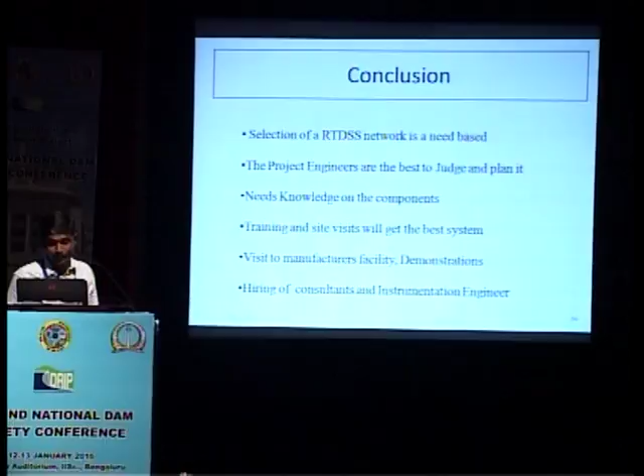Deltares is a research institute in the Netherlands, and I will tell you something about rapid assessment tools for dam safety. I would like to share some of the experience from the Netherlands. I thank the organization and the chairman for the opportunity to present our experience. So a brief overview of the presentation.

I will talk about water management. I will talk about satellites, about satellite measurements. I will talk about FEWS-DAM, our software system we use for safety assessment of dams and dikes. And finally, I will try to conclude in the time limit.

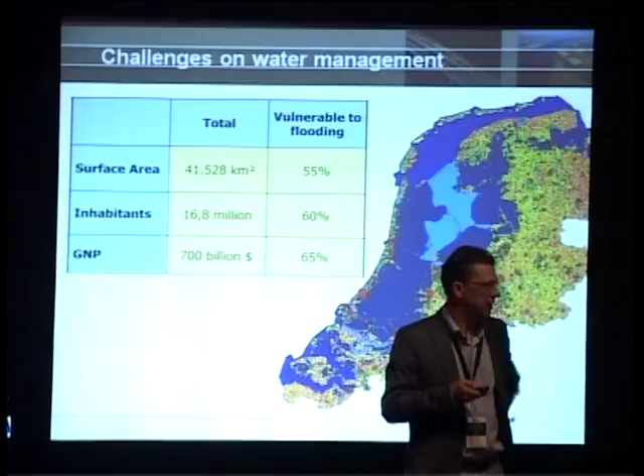Something about the Netherlands. The Netherlands is only a small country in Europe. I think already the state here, Karnataka state, is already 5 times bigger than the Netherlands. It's important to notice that the Netherlands is a country which has a large part of the country below sea level, as demonstrated here in this picture, where you see our country.

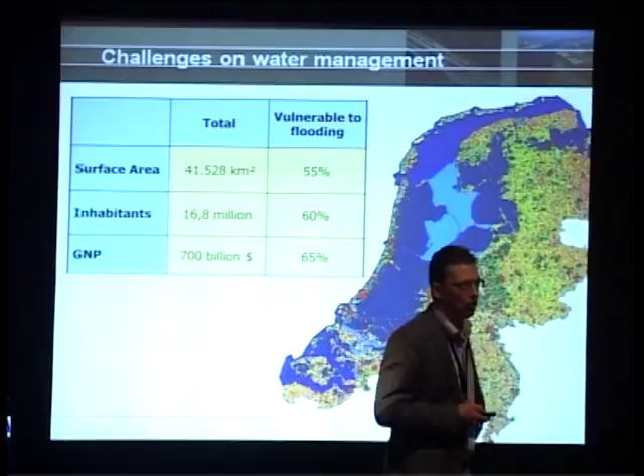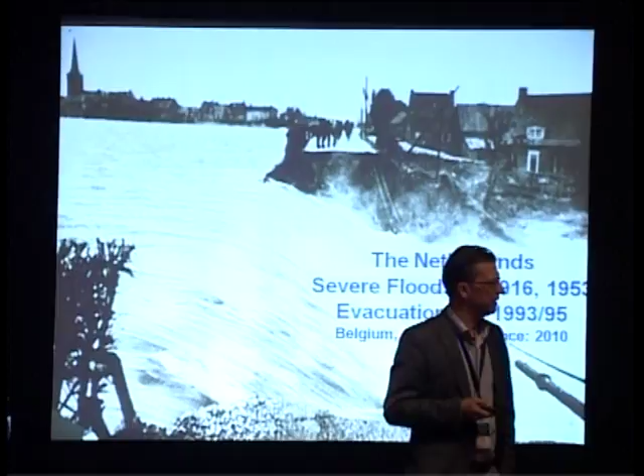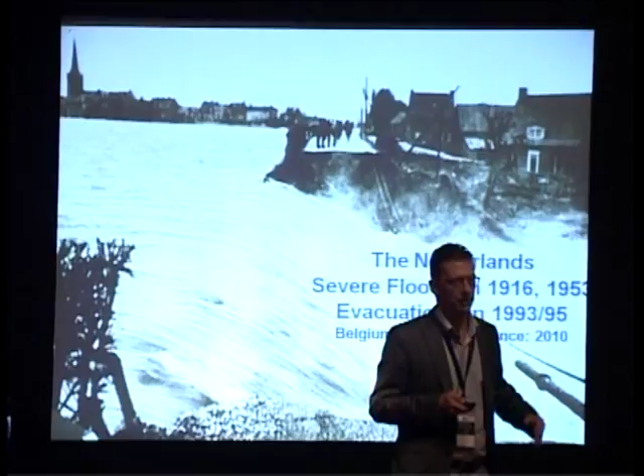If we had no flood defense, about half of the country would be flooded. So we have had problems in the past with floodings. In the 1950s, we had a big flood in the Netherlands, in the southwest corner of the Netherlands, causing about 1,800 loss of life. And also later on, we had flood situations that made evacuation needed in the 1990s. So we had our share of problems.

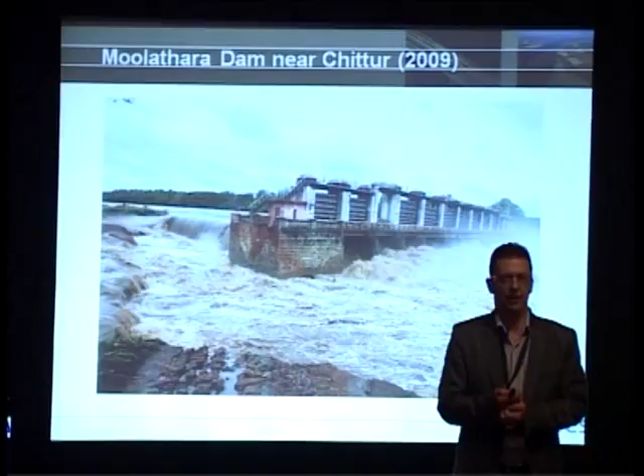Also, looking at the internet, what's happening in India. For me, this is the first time in India, and it has been a wonderful experience. And looking at what's happening here, I noticed this one. Also in India, you see a lot of challenges with water management, drought, and also flood.

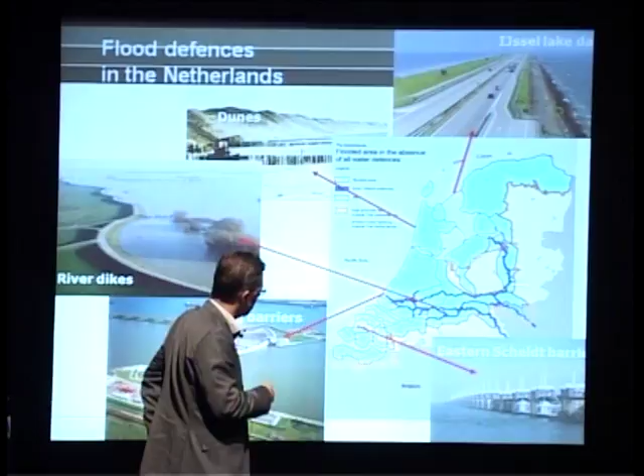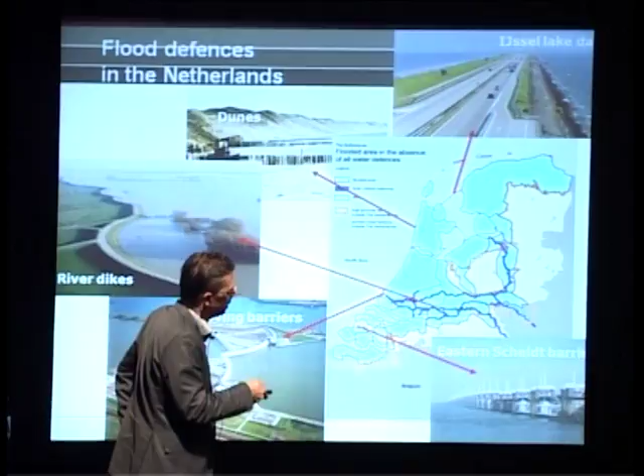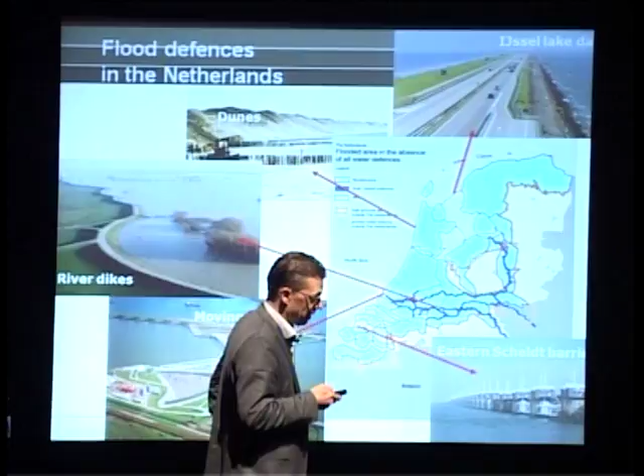To tell you a little bit about the flood defense system in the Netherlands, we have a lot of systems to make sure that we keep our feet dry, as we say. Here's the Netherlands, and the North Sea. These are our main rivers. So it's a threat from the sea and the rivers. We have dunes, we have dikes along our rivers over here. We have moving barriers to seal off entrances to the sea, etc. So we have a whole set of things to work with.

So now to the first innovation that we think is important to share also with you. That is an option to apply in India, and this is the use of PSInSAR satellites.

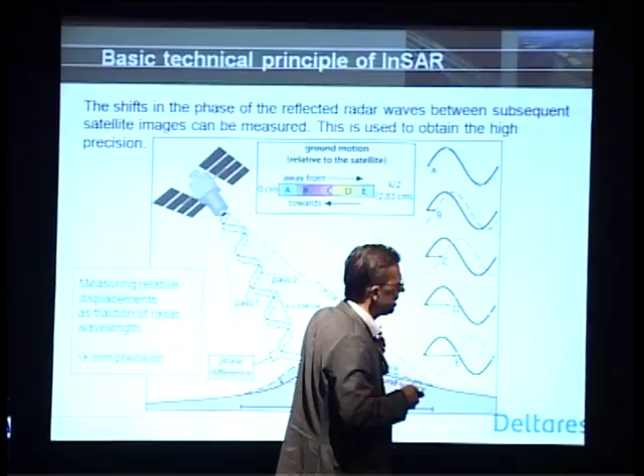These satellites are flying around the Earth. At the moment, new satellites have been launched in Europe that pass over India twice a month approximately, doing measurements. These measurements I'm talking about do local measurements. What I'm talking about here is persistent scatterer radar. You see here a picture, the satellite is flying over and sending out pulses and receiving reflections. Then on the second pass, about two weeks later, it will do the same, and we will look at phase differences between those reflections that you receive. That gives you information of the subsurface, the surface of the Earth, and that is essentially the measurement principle of this system.

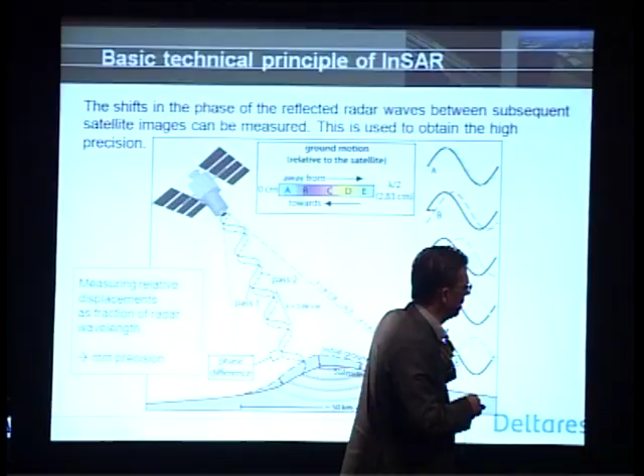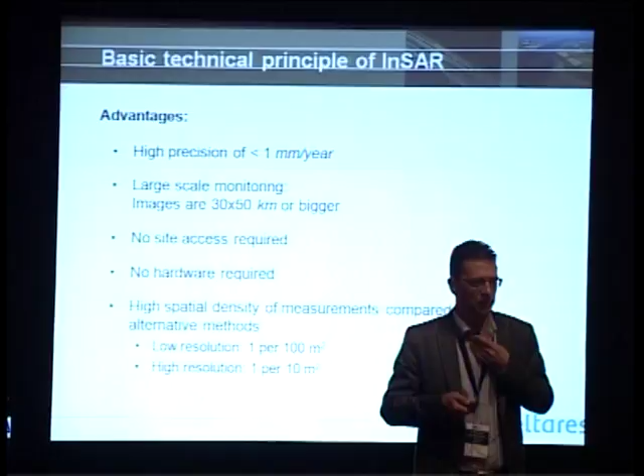So what does it bring you? It brings you a high precision of deformation of the surface of the Earth, at millimeter precision. And also the images that you get are big images, about 30 to 50 kilometers, so you get information about a large area. You don't need any site access, you don't need any hardware, and you get high density measurements compared to alternative methods. So there are different satellites with different resolutions. The low resolution gives you reflections from 100 square meters, and the high resolution gives you 10 square meters.

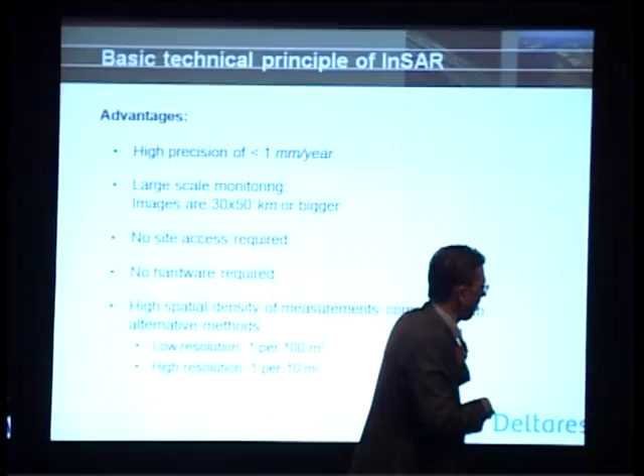I have two examples of this. Due to the time, I will skip this one. I will limit myself to one. This is a situation in California where you have an embankment dike. This is Diamond Valley Lake, and here we have measurements with the satellite system.

So you see here the results of such measurement. On the left side here is the PS InSAR, and on the right side are comparing measurements done by geodetic measurements. So you get a lot of information here, your scatterers give a lot of information.

What you see here is the deformation of this dam in millimeters per year. You can see that there's not a lot of deformation over here, but for example, here there's an area with much higher deformation, up to 5 millimeters per year. If you compare this with traditional geodetic measurements, you see a good resemblance that proves that the system works, and now this gives you much more detailed information. That's one of the main advantages of this technology.

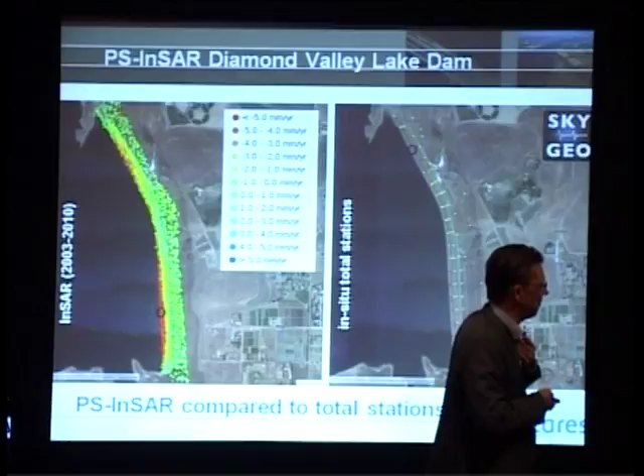So that was one topic I wanted to discuss with you. The other one is our software and our approach to dam safety. As geotechnical engineers, we are used to evaluate dams and dikes for their safety. In the Netherlands, we have a law that says we have to do that every 6 years.

This is a lot of work, because in the Netherlands we have a lot of dikes, about 20,000 kilometers, so we started automation of this, and this software came out of that development. Not only do we do a lot more calculations, but also we use different types of modeling.

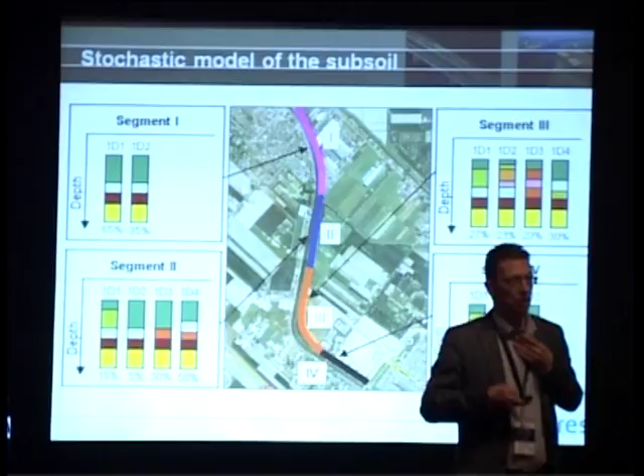What we used to do is maybe every few kilometers make a cross-section to do your calculations, but nowadays we do a cross-section every 10 meters and do a calculation for different failure modes to assess dam safety. We also work with stochastic subsoil models and different compositions of your dike, taking that all into account in our calculation.

What you see here is such a length of a dike, and we estimate the subsoil conditions over here. We're not working with one profile, but in this case we're working with two profiles with a different probability of occurrence. The color and the layering of the soil is shown here, and the colors indicate the type of soil and the properties of the soil.

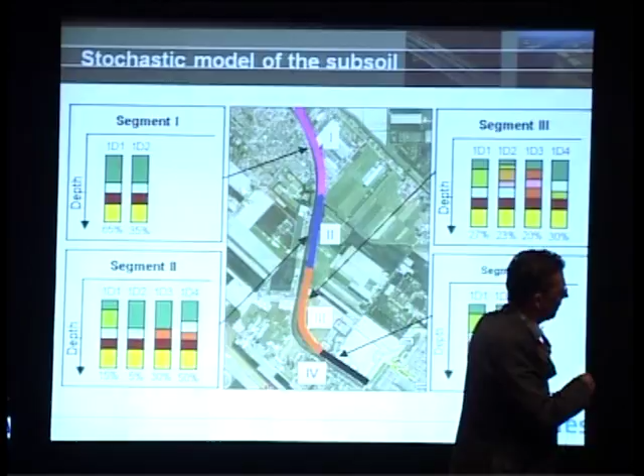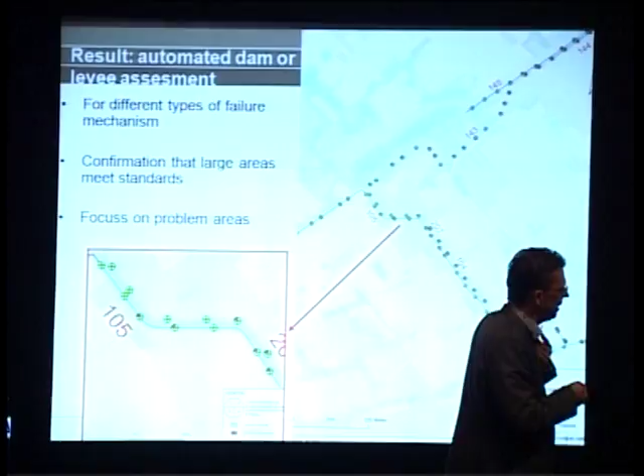So we do all the calculations and then show the result in a map and give the information to the owners and operators and the people responsible for maintenance of this dike system. This information is very handy, because you can already see areas like over here where not much is happening, everything is in the green, which means that for all the failure mechanisms the safety assessment is okay.

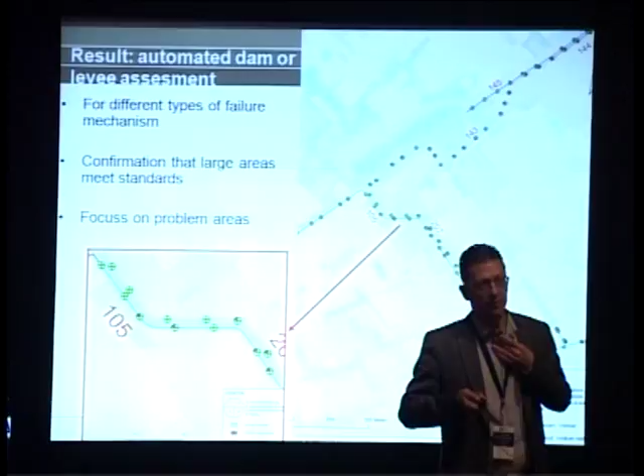But you can also see here, for example, that a lot is in the red, which indicates that the dam doesn't meet the criteria, doesn't meet the standards. So an operator of the system immediately knows that he has to do more investigation in this corner to see what is really happening over there.

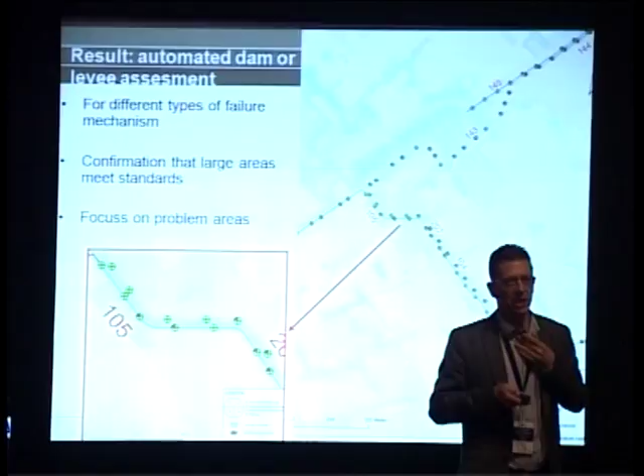So a next step is inverse modeling. I will skip this one, but the next step is, if you have a system where you have put all your information in databases and you are able to do a real-time estimation of dam safety, you also want to use the same system for forecasting.

Forecasting involves the use of instrumentation. So in some of our dikes and dams we have instrumentation, and this is sent over in real time. Combined with the modeling, we are able to do forecasting of dam safety.

You see an example of this. Here you have one of our river dikes, and this is a situation with high peak discharge of our river. Here you see that we have put in instrumentation in the dams that is transmitting information, combined with our modeling.

Shown on this side is an example of the result of such real forecasting, where you see that in this area there are areas that are okay, in green and yellow, but there's also areas like over here that look threatened.

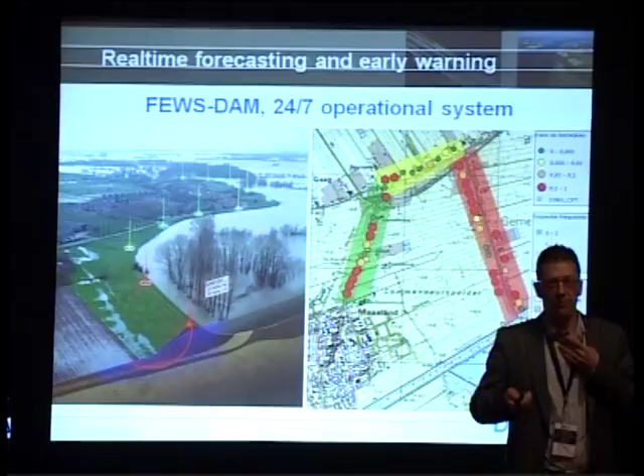So this is used for emergency action planning. The authorities responsible for this are able to determine what to do - they can maybe reinforce the dike with an emergency reinforcement, or if necessary can do an evacuation of the population. And that's basically the system.

So to conclude, I think I've shared a little bit that India and the Netherlands share a lot of challenges in flood risk management and water management and dealing with all these kinds of things. I think we can both learn from each other, and that is an important aspect of our institute, Deltares.

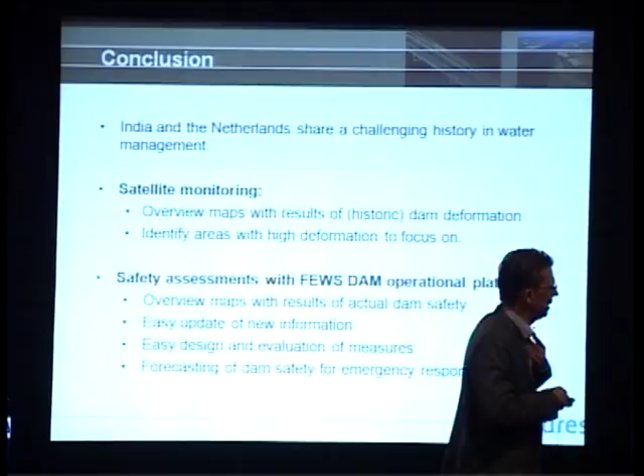I've shown you some examples on satellite monitoring, giving overview maps of dam deformation and historic dam deformation, giving you the ability to determine areas with high deformation to focus on. I've also shown you what we can do in safety assessment of dams, showing this in overview maps, which makes it very easy to update and to design and evaluate measures.

Thank you for your attention.

Thank you for the opportunity to share the floor with you. In a few words, within 10 minutes, we'll try to sum up who we are, what we are doing, and our purpose. We'll focus on one of our technical solutions, the dry shotcrete.

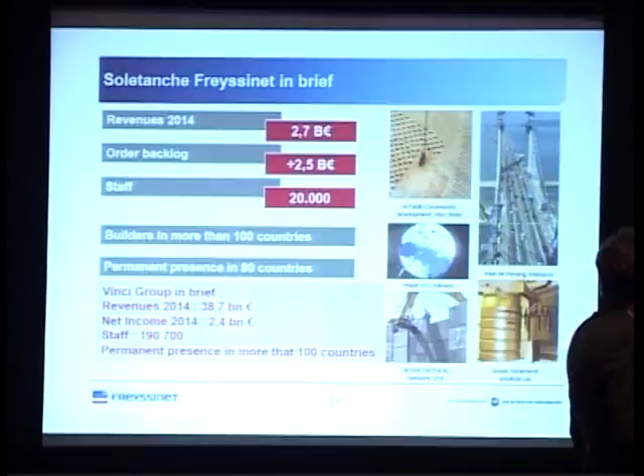Freyssinet belongs to Vinci Group, which is the first contracting company in France. We have a worldwide location. Within our group, we have 5 major activities: Soletanche Bachy for foundation, Menard for improvement of soil, Terre Armée for reinforced earth, Freyssinet for structures, and Nuvia for nuclear civil work.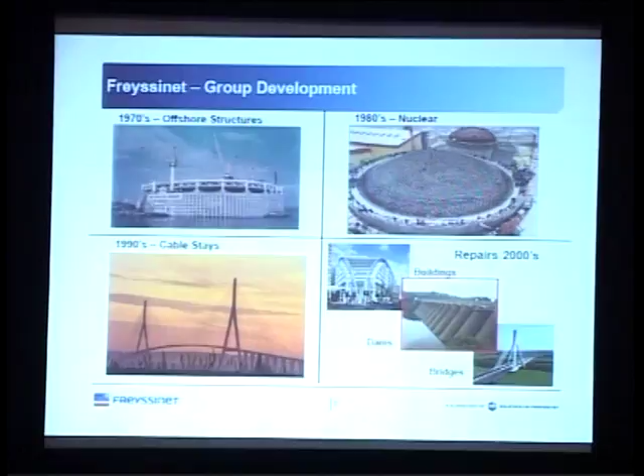In the 70s, Freyssinet dedicated its activity to offshore structures. In the 80s, nuclear activity in civil works, cable stay, and in repair since 2000, mainly in dams and bridges. Our concept is to cover everything from technical concept, design, supply, installation, and monitoring. Every year, we apply for 20 patents.

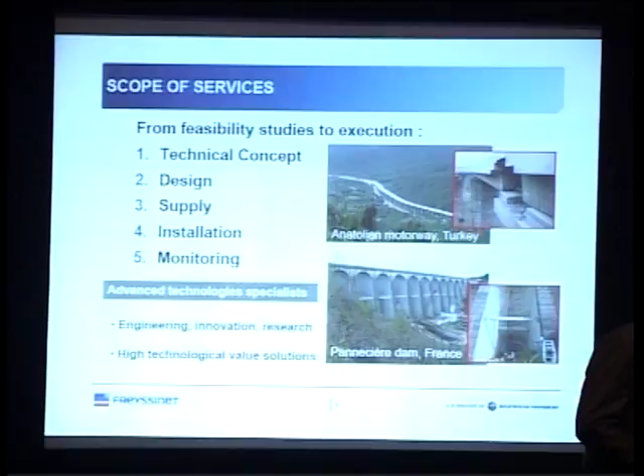So from now, I will pass the floor to our colleague Kanan, and he will go through our Indian activity mainly.

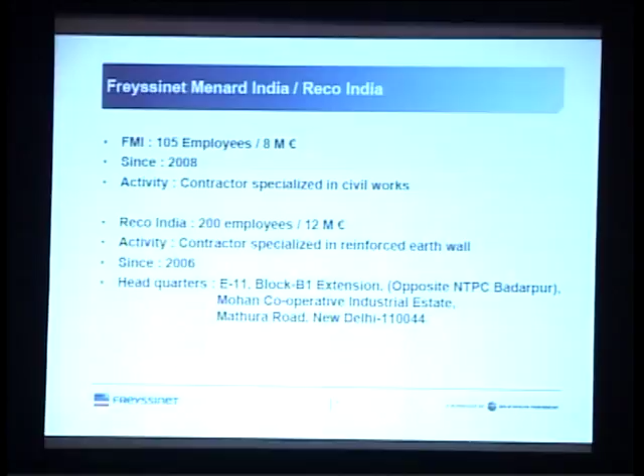So I am Subramanian Kannappan, working as a Chief Operating Officer for Freyssinet. In Freyssinet, we now have 2 groups in India: Freyssinet Menard India, and the second one is Reco India.

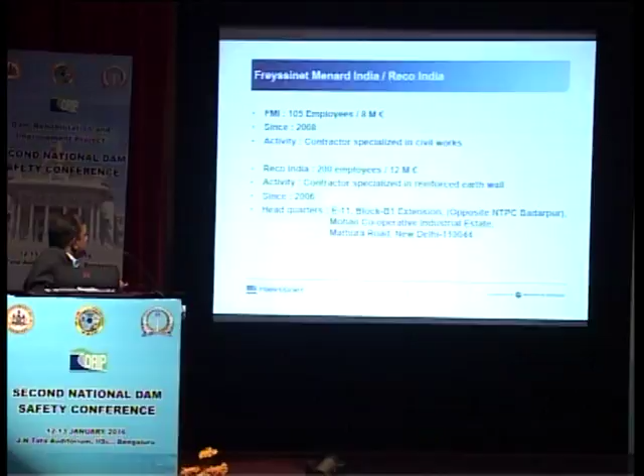In Freyssinet Menard India, we currently have 105 employees with 8 million euros of business. The second is Reco India, where we have 200 employees and 12 million euros. Both these companies are involved in new construction as well as repair and rehabilitation.

Our presence is basically a corporate office in New Delhi, and regional offices in Mumbai, Kolkata, Bangalore and Chennai. So we are geographically present completely in India. Our core activities started in 2008.

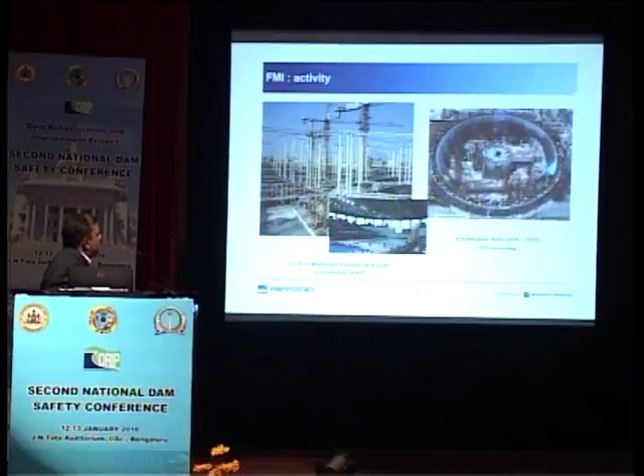First was the SP Mukherjee Stadium in Delhi, where we constructed the roof with a different technology using cables. And this is Kudankulam nuclear reactor, where we installed the post-tensioning, this unbonded system.

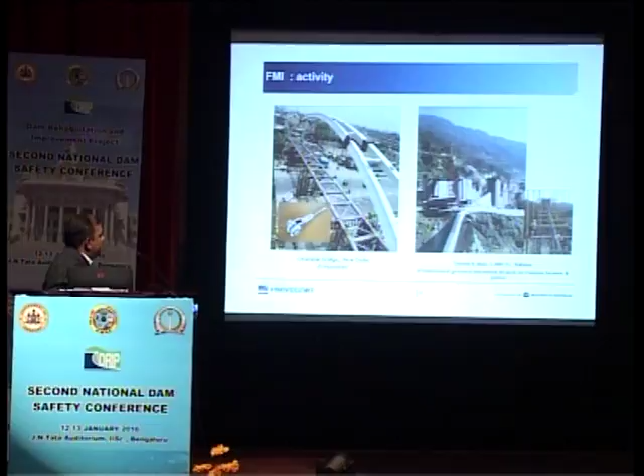We are also into new construction with hanger bars, and also in dams and barrages we do post-tensioning systems. We are also good in stay cable technology.

So we have done three stay cables in India. One is Chambal, the second is Lakadia stay cable, and the third ongoing is Bardhaman.

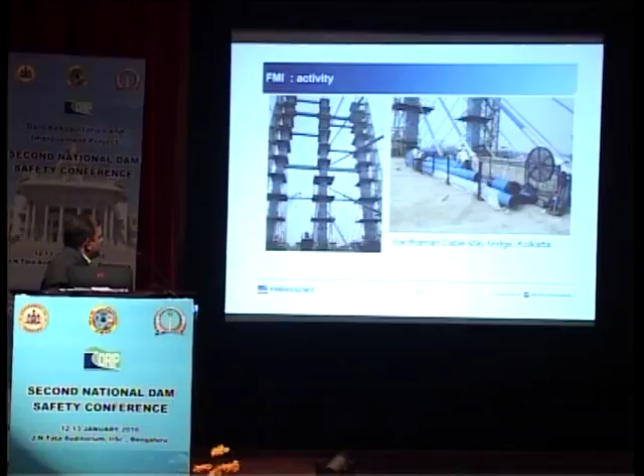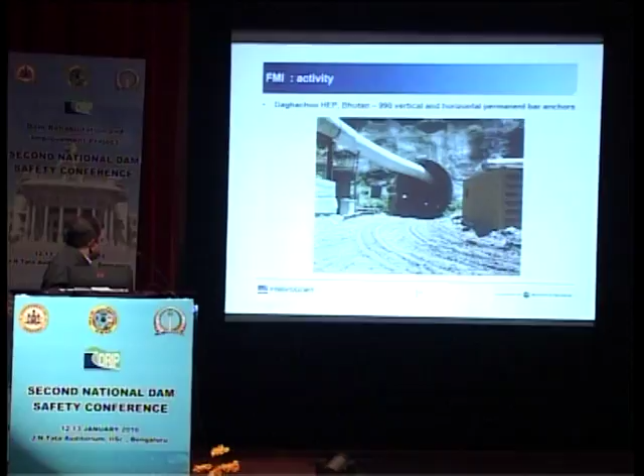And these are some ground anchor projects again in the Supreme Court, Delhi, and also the High Court, New Delhi, and we are also active in LNG projects in India.

So luckily we are working on 3 projects. These are all a small introduction about Freyssinet and what we are currently doing in India. So that's all new build, and we are also doing some one or two projects in repair and rehabilitation.

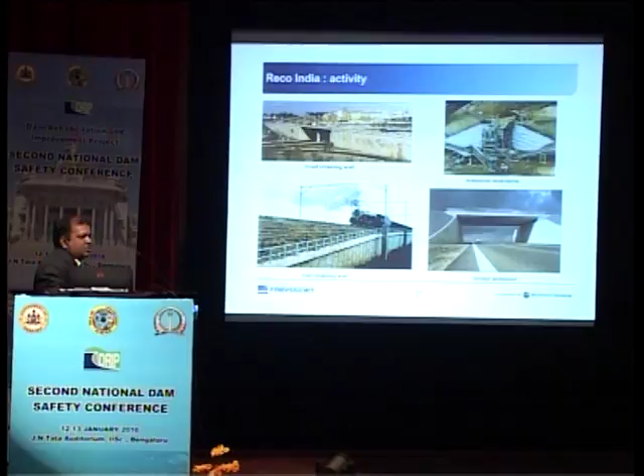This is about Reco India, where they are doing earth wall structures, and also industrial structures and rail retaining structures. So about this Freyssinet portfolio...